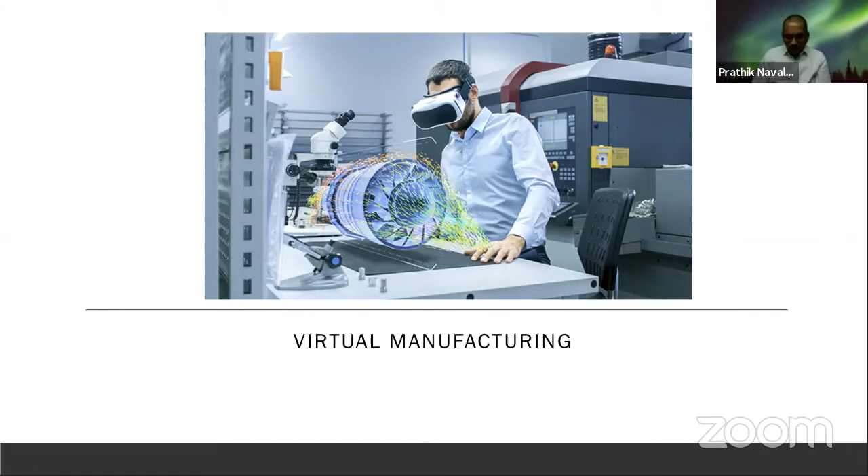So what is virtual manufacturing? What I stated here are basically the definitions which I have understood based on my working in this field. It's performing activities in support of manufacturing virtually. Virtually means you're off-site. You're not physically at the location where the manufacturing happens, and you're doing it on a computer. And we know manufacturing is basically a conversion of raw material into usable form. It could be steel, tubes, hoses, any other things. It is also conversion of usable raw material into finished products as per the customer specification. These are the definitions of manufacturing we learned during our education.

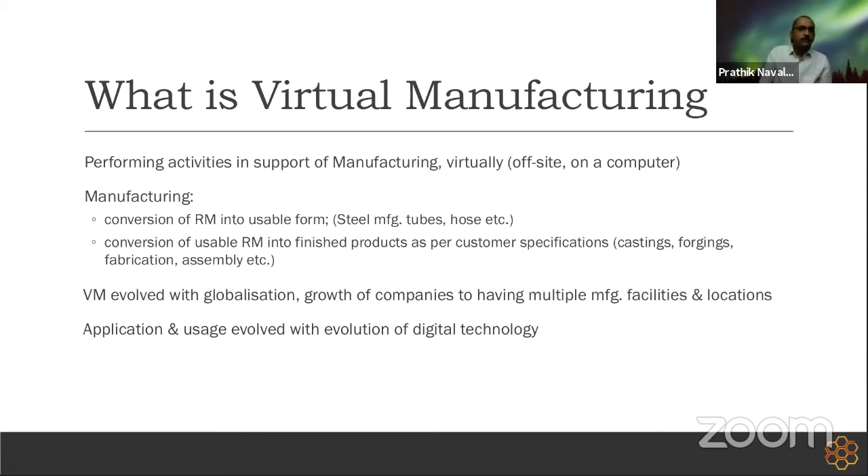Now, virtual manufacturing basically evolved with globalization. As companies grew and started having multiple locations, and as the need for standardization grew, there became a need for a centralized manufacturing team. Along with that need, there was an evolution of the application, which paralleled the digital technology evolution. In the initial days, there was one factory at some local manufacturing location, and they had their own local manufacturing engineering teams doing the process design, the layouts, the line design, implementation, prove-out, production. So basically, it was dedicated.

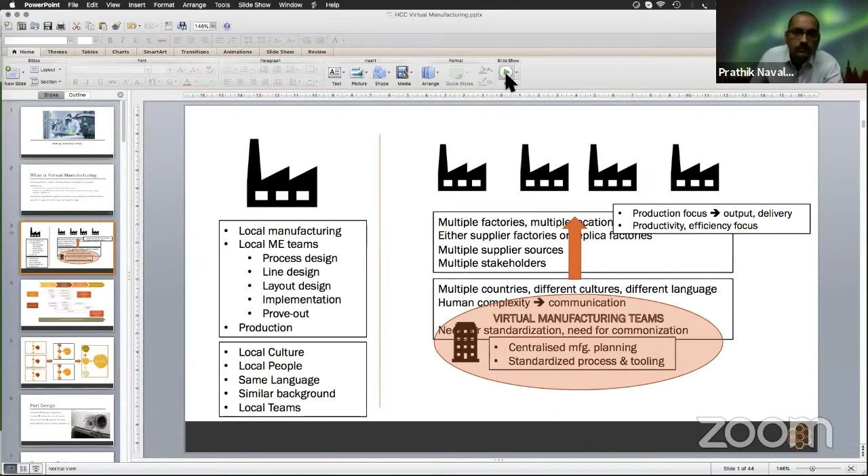Prathik, I think your slide is not changing. Currently, what I see is the virtual manufacturing slide. Oh, is it? Sir, I can see the local manufacturing slide. It's changing, sir. Okay. Maybe it's my side. No problem.

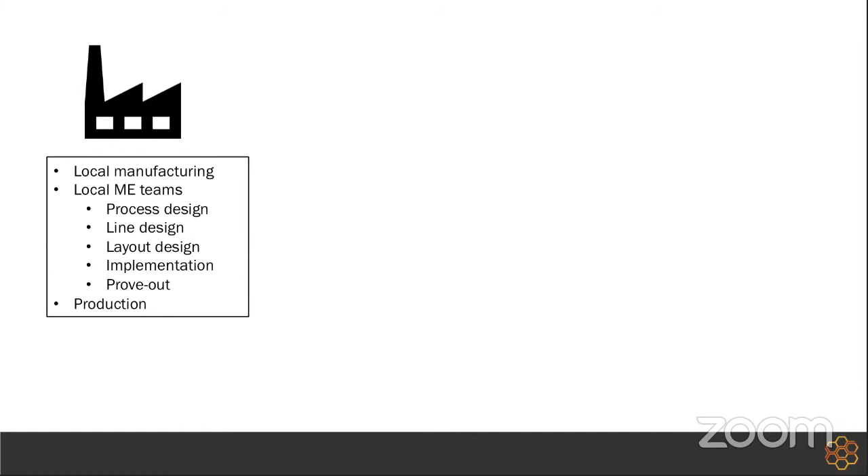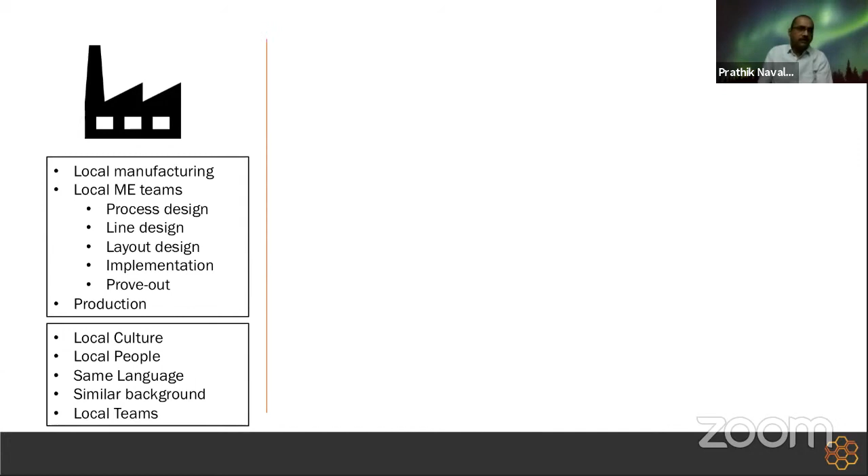Okay. So, like I said earlier, with a dedicated team supporting each factory, the companies were producing. But as the need for the products went higher and globalization expanded, things changed. Earlier, they had a local culture and local people; it was easy to interact, they spoke the same language, and they grew up in a similar background. Hence, the issues that came up were easy to resolve. However, upon globalization, factories started at multiple locations, and either the suppliers were from different places or the same product was made in different locations, with multiple supplier sources and stakeholders across the globe. So then came the complexity of cultural differences, languages, communication.

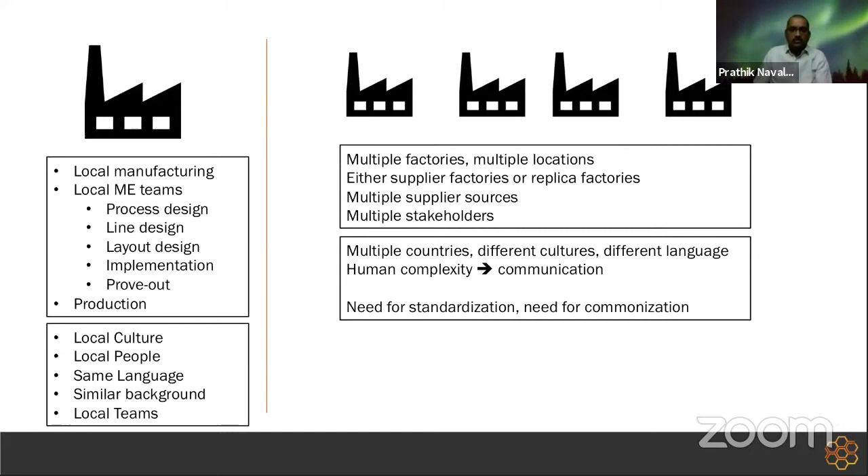Hence, communication became a big challenge. So companies realized the need for standardization. No matter where the product is made, it has to be made the same way, and it has to have the common parts. Only then the cost benefit is leveraged. So with this came the concept of virtual teams: centralized design and manufacturing teams sitting virtually in an offshore technology center, supporting the multiple factories. They were the ones driving the standardization of process and tools, while keeping in mind the local requirements to support the factories.

And the local factories were to focus on the day-to-day work, daily production and output, production, delivery. That way, the businesses were able to leverage the best out of their investments. So this is the background of virtual manufacturing, how it evolved.

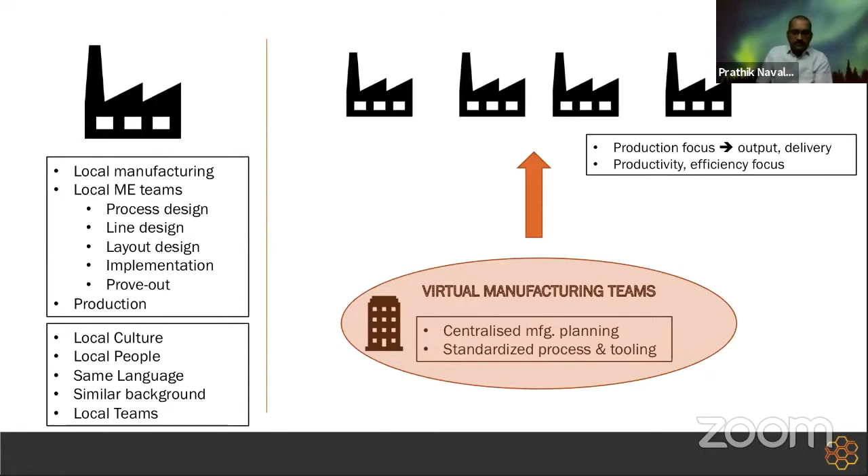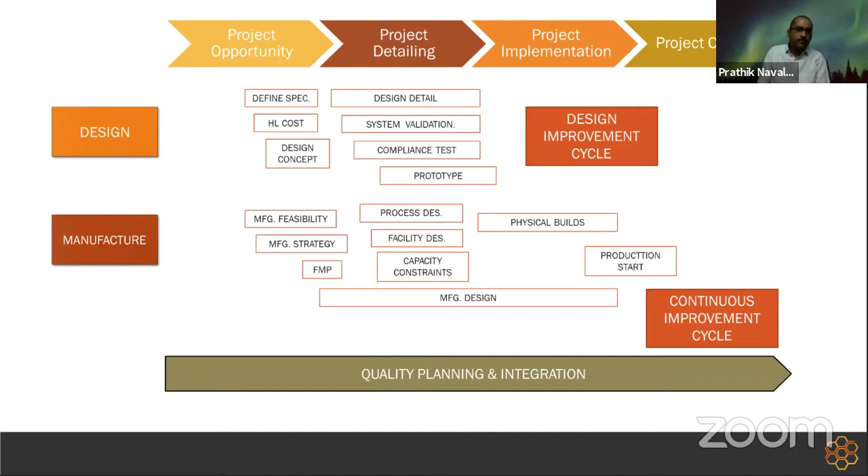Moving on, now we'll focus a little bit on the design cycle. So when we look at global design today, a design consists of parts. Parts go into a component, components go into a system, and systems go into a product. So this is probably the simplest version I could put forward to give the sense of complexity that exists in the real-time world today. So when you look at some of the common machinery that is on the road today with agriculture or construction, there are typically about 30,000 parts that go into the machinery.

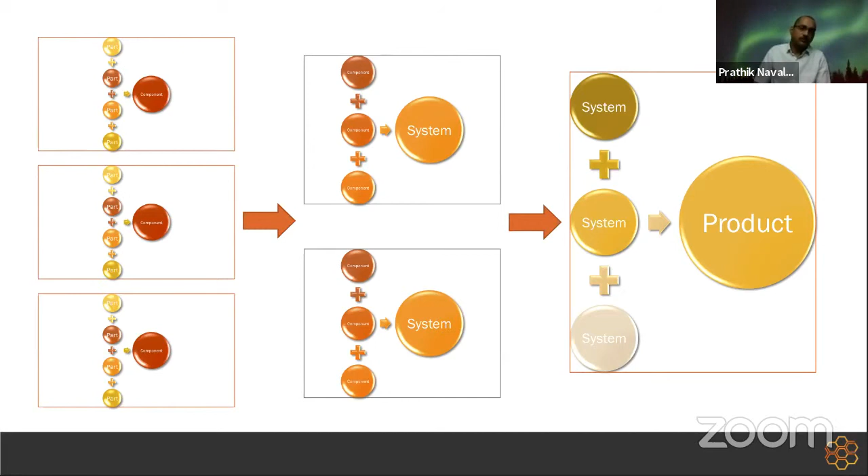So these 30,000 parts again get accumulated as components, systems, and products. So what companies do is they have their virtual engineering teams, individual design engineers designing the parts at a part level. And then there would be an integrator who would integrate it into components and systems and products. So these are today possible only with use of digital tools, like you will see in the upcoming slides.

So now when we talk about a part design, I want to also mention what is significant about part design. Okay? Although we're talking about virtual manufacturing today, it is important for us to understand the virtual engineering portion of it, which is primarily focusing on product design.

Because today, design and manufacturing are not two sides of a coin. They work very closely hand in hand, as you saw in the earlier product development chart. So it is very important for us to understand the constraints and the philosophy of design as the product gets progressed in its life cycle.

So when a part is designed, the photograph that I have here is basically to give you an example. What you see here is a very simple fuel cap. This is a fuel tank cap that we all see in our cars today. So what goes into design of this cap? There are compliance, ARAI or respective bodies, SAE, have standard guidelines and compliance safety norms to ensure that the product does not cause any legal or safety issues. So the design engineer has to work in compliance with those standards and some of the basic specifications which are there. And the specifications are derived based on the standards and the application.

And then there is a geometry. Now you can see here, for example, the physical constraint for the design engineer is that it has to go and fit into the fuel tank and it has to be accessible for the end user. So there comes into the mating parts, the assembly, and the serviceability, which he has to keep in mind. Then the physical boundaries. You are forced to work within a physical set of constraints, boundaries which cannot change, and which will define the clearances and the tolerances within which the part must be designed.

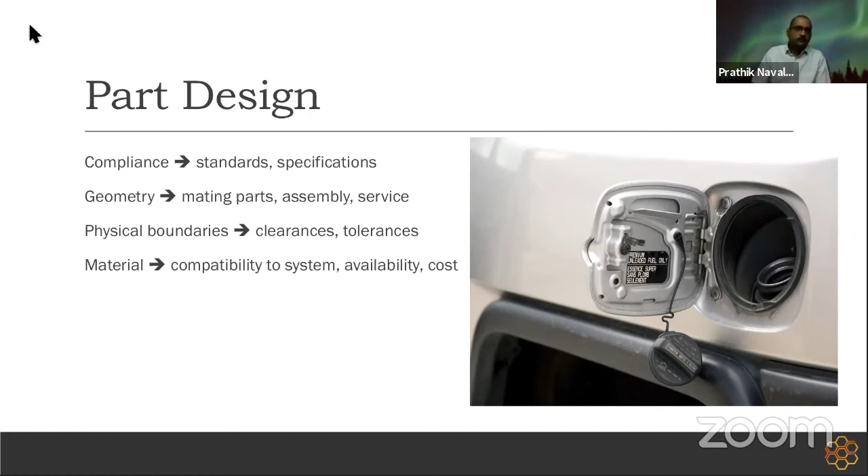And finally, also the material. In olden days, the design used to be based on the material locally available within the area where it is designed. But today, when we talk about global designs, we have to keep in mind the common material which is available at most locations. So material availability is very important, and the cost. You will also see later today how, within the virtual engineering and virtual manufacturing domain, the costing is also taken into account. So this is specific to a part design.

Moving on to a component level design. What you see here is again an example of the railway. When you go out near a railway track and see the wagons that go, this is what is underneath the wagons. So this guides the wagon. This is just for information. So this is called a bogie. The bogie is a system, and some of these elements within the bogie are components which consist of multiple parts. So when the design is done at a component level, it integrates multiple parts. So it becomes very critical for a designer today to visualize how overall the parts come together to form the component.

So this is an example where the digital tools which we spoke of yesterday, and the virtual visualization, come into play for effectively designing the components. And when a designer who's sitting virtually and designing a part is able to understand how it fits into the next level of the component, he is able to understand the constraints better and able to churn out the design first time right.

And then there is virtual validation. Virtual validation is a key part of virtual engineering, where many companies no more go into lab tests. What they do is they use the advantage of the digital technologies to do the virtual simulation. For example, if it is structural validation, we have finite element methods, and today software is capable to handle advanced complex designs and still give you a reasonably predictable result.

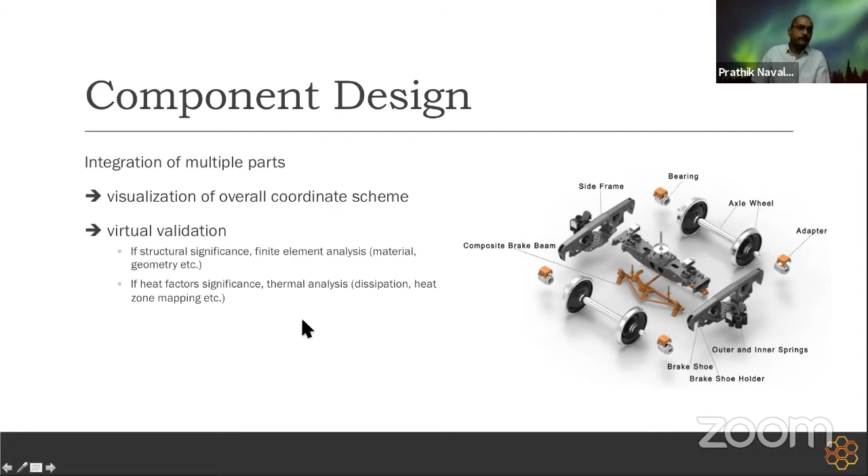So now here is a live example of how this virtual engineering, specifically finite element analysis, is used in the industry. Again, going back to the bogie example, what you see here is a typical wagon that is used for carrying iron ore. This is a common sight for anybody who stays near the railroad lines. And what you see below is the bogie, where, through use of virtual tools, you're able to explore the various components and understand visually. You don't need to be physically present near a bogie to understand how it falls through.

And this is an example now where the finite element method was actually used not to check the structural integrity, but to derive the loading and boundary conditions for redesigning this component using composite materials. So this was for an advanced research project. And so there we simulated the existing brake beam. This is the beam that applies the brake on the wheels for the train.

And the loading conditions were put in. And this pattern was used as a benchmark or as a maximum load criteria for design of the composite bogie. Okay. So what is of importance for today's engineers is to understand that in finite element methods, the person must have a good functional understanding of the system before he or she gets into it, understand the material properties, the boundary conditions, the loading, and also the interpretation of the results.

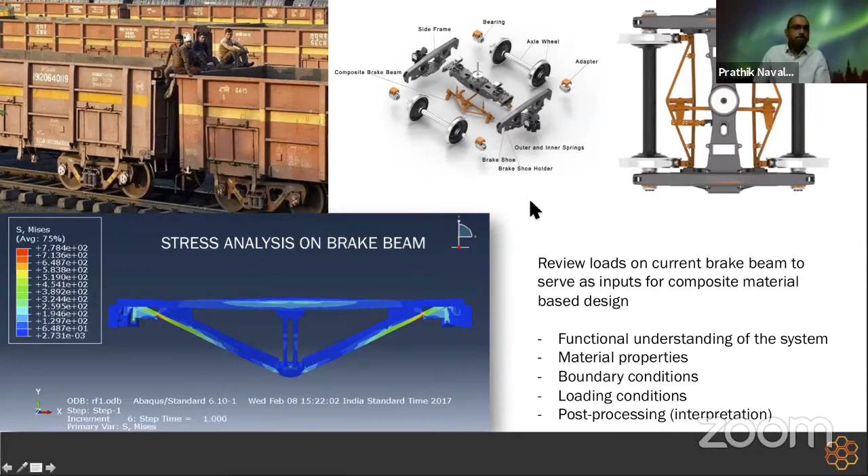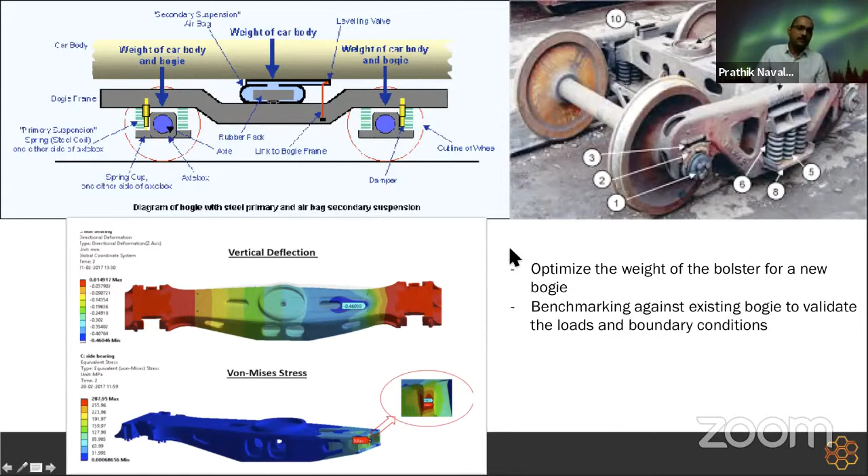So we spoke about part design, we spoke about component design. So next stage in this is a system design. So when the components are integrated within a system, it's important to make sure there is a functionality check that is done. Okay, so there are several tools today in the market for performing this. For example, if we take the suspension system of a two-wheeler or a four-wheeler, it is going to be complex for us to go and do manual calculations and also visualize how the system would function on the road, right?

So earlier, how they used to do it is they used to have cameras embedded to understand the vertical and lateral movements and have strain gauges attached to them to understand the loading criteria. So now with advances on the digital front, there are software available to perform what we call multi-body dynamics, to understand the dynamics of the interaction of different parts, what we call bodies, which interact with each other and which are constrained by each other.

When a suspension system is attached to the chassis and to the axle, it is constrained at those 2 points. So when it functions, it is not allowed to freely function, but it works under constraints. So that's a simple explanation of that. But MBD assessments are very common today in the automotive field.

Then the other thing that is done is clearance analysis. Again, when multiple parts, to the level of 30,000 parts, are going into a system, and if there are 25 different engineers working on it, it's very common for people to miss out on some of the features of the part. So before the design is progressed further, there is a clearance analysis which is done to make sure that part interferences don't exist and there are not any unpredicted gaps. I'll show you some examples of that in the next few slides.

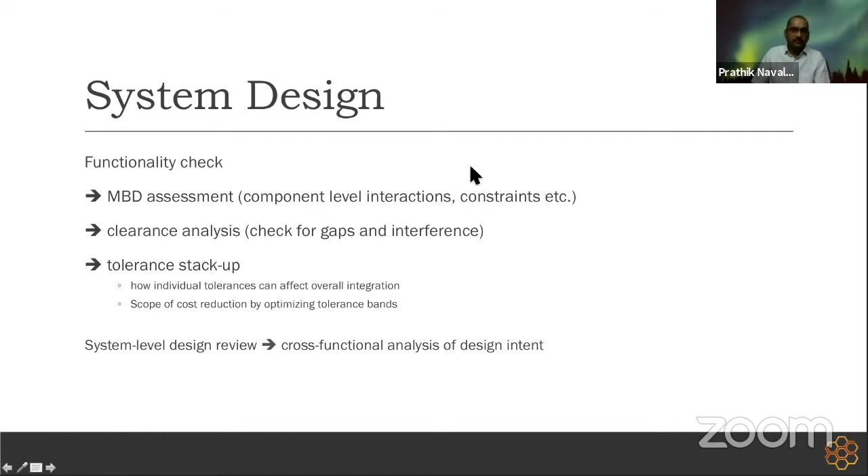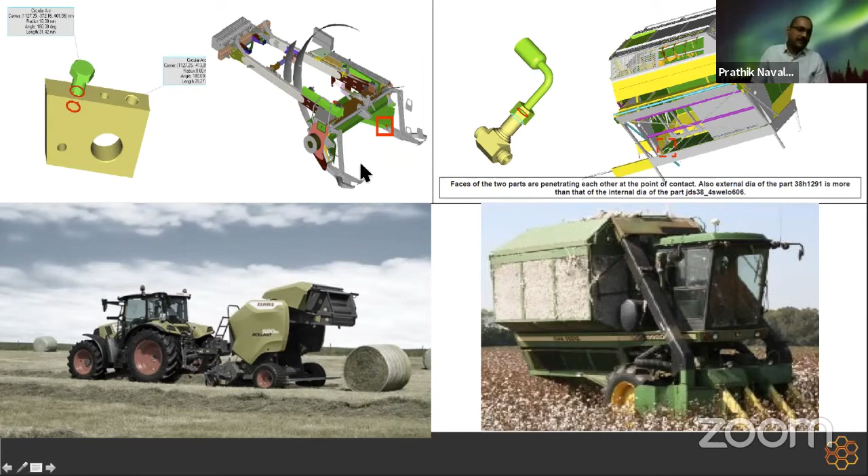Next, we talk about tolerance stack-up analysis. So while this has been a quality function, nowadays it is falling on the plates of a manufacturing engineer and in some cases a design engineer, where at the time of design itself, they go back and validate how, at a system level and at a component level, the tolerances stack up and what room they have to increase the tolerance bandwidth so that they're able to reduce the overall cost.

So next, we'll see a video of how the digital tools today enable a manufacturing engineer to perform this analysis as he validates the design.

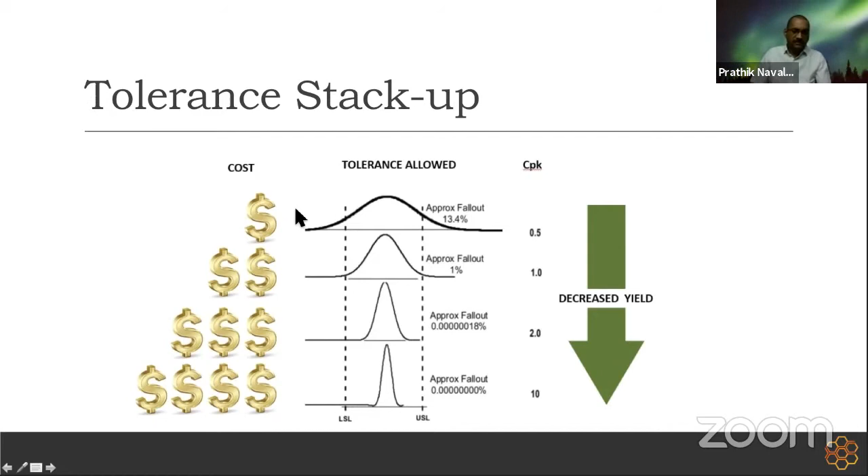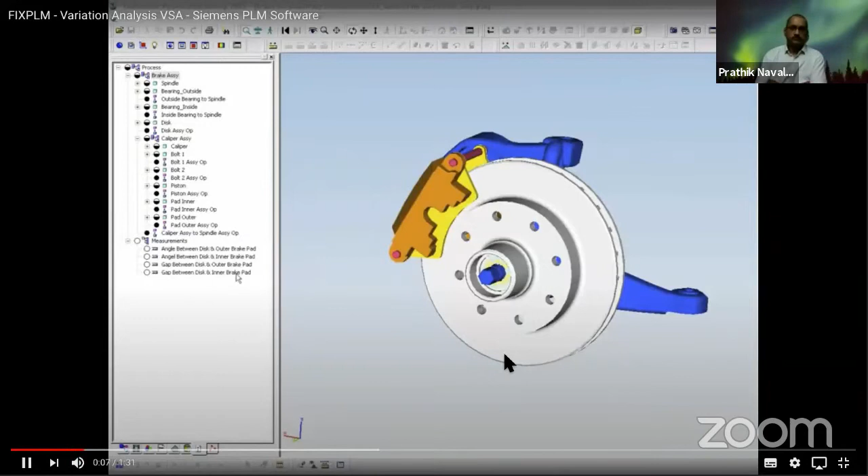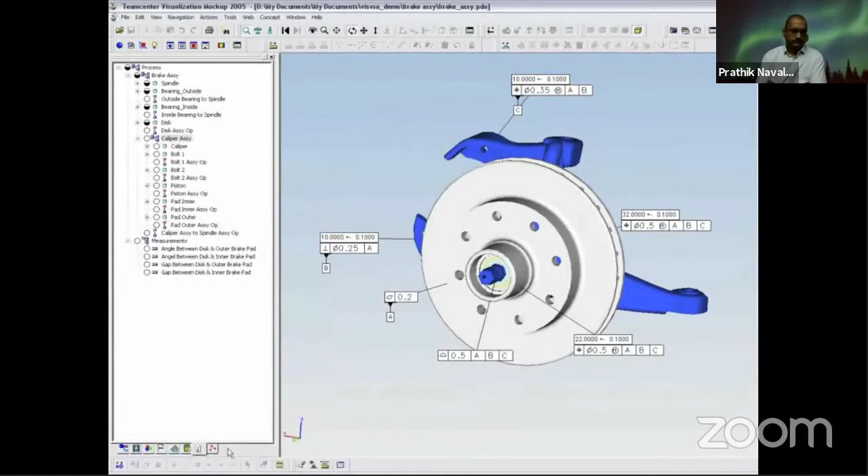Variation in assembly build problems. In this example, we'll look at the variation introduced through the process of building an automobile brake assembly, where controlling the angular variation between the brake pads and the brake disc is critical to the proper function of the braking mechanism. The entire process model is represented in a tree structure on the left side of the window. The process tree contains all the elements that comprise the analysis: parts, assembly operations, and measurements. The features contained within each part that are used as datums in assembly operations or for measurement are toleranced using GD&T, or geometric dimensioning and tolerancing.

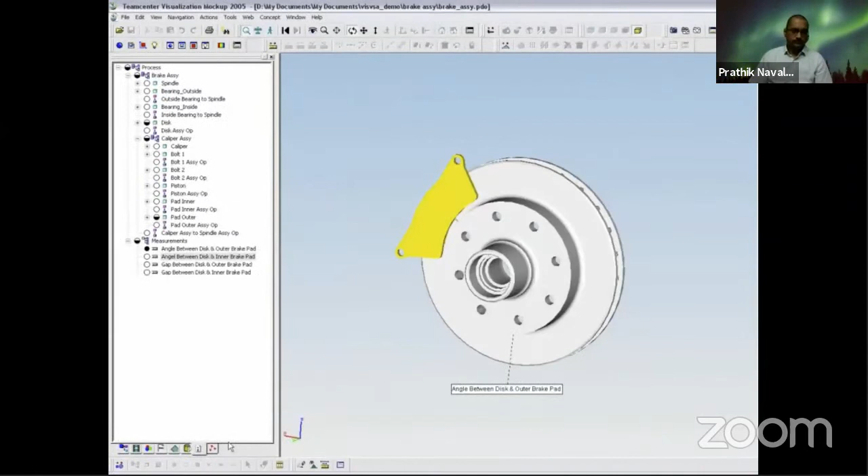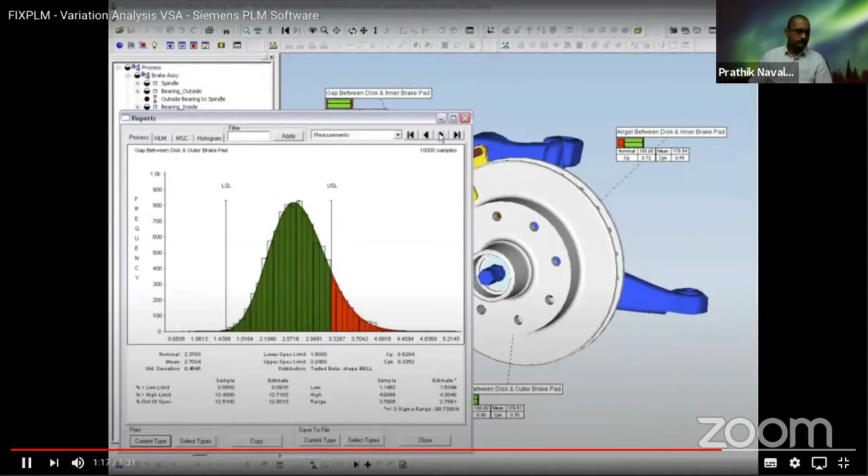Once the features and tolerances for all parts have been defined, assembly operations identify how these parts will assemble or interact with one another. The next step is to define the measurements for the critical dimensions to be controlled. In this case, the angle measurement between brake pad and brake disc. Once the process model is defined, simulations that replicate the virtual build of the brake assembly are run. From the reports generated, the variation magnitudes and contributors may be viewed for each measurement. Model parameters, such as tolerance values, may be changed and the simulations rerun to ascertain the impact of the change across the entire assembly.

So what we saw there was the tolerance stack-up analysis for this wheel disc assembly as it was narrated. And this is something that today is a very common sight. You go back and see design engineers and manufacturing engineers who use such tools. There are many tools available in the market where they are able to concurrently modify the designs and determine the adequate tolerances for the parts, thus being able to deliver a product first time right, at the same time at the right target costs. Okay.

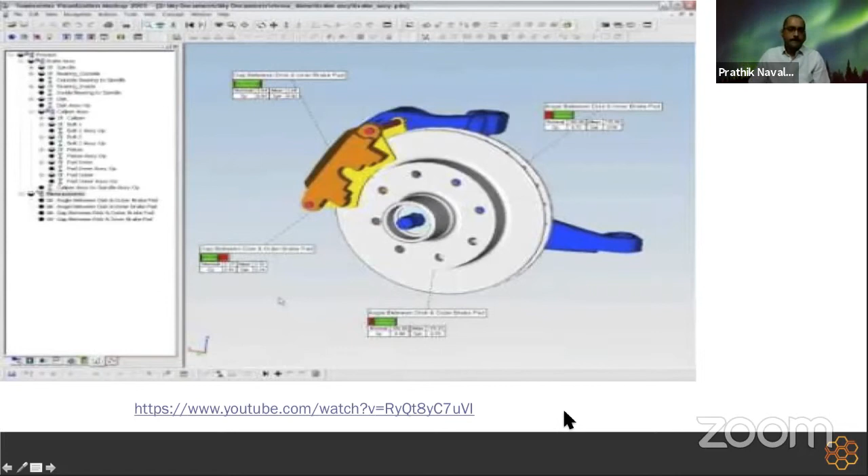So just a second. Okay, so next we come to, so we saw part design, we saw component design, we saw system level design. Okay. So now when all of this integrates into a product, that is the end saleable commodity for which all the groups have been working towards. So it's important for the designers now to look at systems integration, how the systems integrate. So this is a very, very important and critical function that you will see in the video to come.

And as they look at the integration of systems, they are able to dynamically modify the designs through digital technologies available today. Another key feature which you will see is the marketing alignment. Much earlier in the concept stage itself, companies today use virtual reality capabilities to showcase the upcoming product to their dealers and their customers, to receive live feedback so that their valuable feedback gets integrated much earlier in the product design lifecycle. Again, another video that I'll show you towards the end showcases this capability.

And then the compliance check. Okay, today when a tractor is designed, when a car is designed, they have to comply to certain specifications, such as the turning radius, the overall boundary of dimensions, the emissions, etc. So these are possible, again, like I mentioned before, through use of virtual tools.

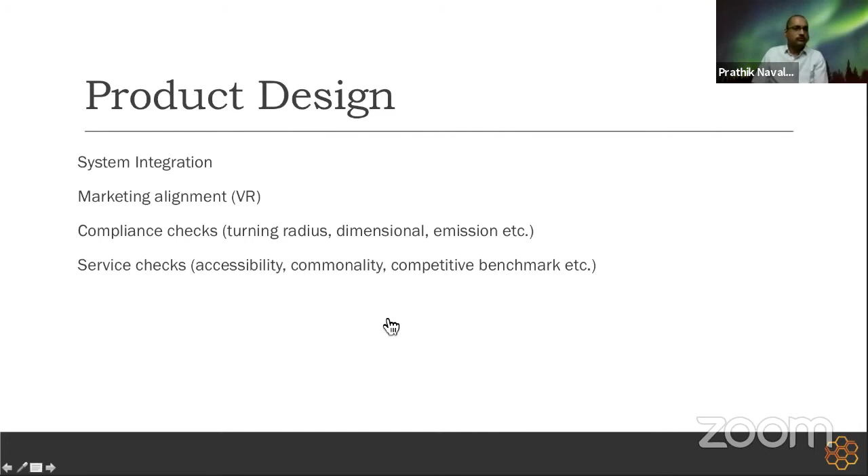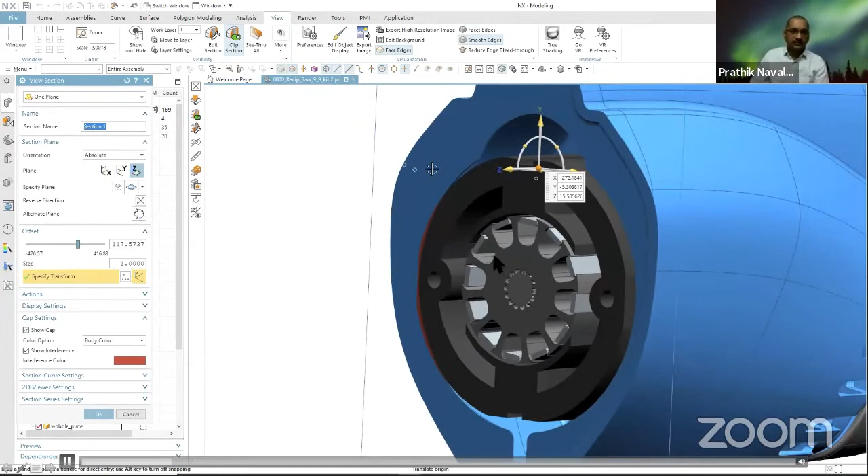What you see is an air gun. This is actually a drill, hand drill, and or a hand screwdriver, where you can see dynamically how the designer is able to verify the individual systems and components that have been integrated. And at areas where additional clearances are required, he's able to modify them. So here you can see at the body, he's able to go and adjust the rib.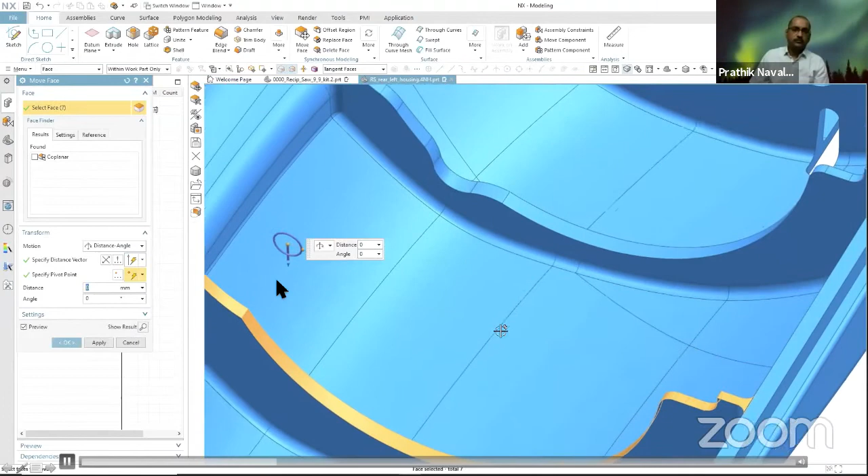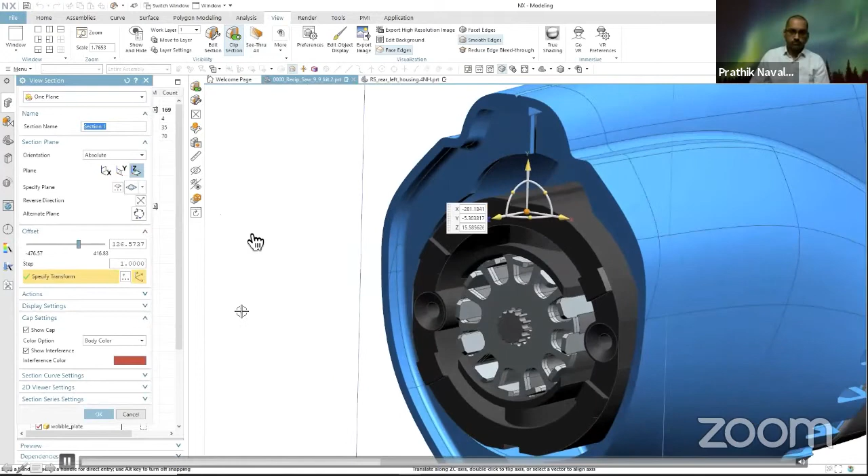Right now, at the time this part was designed, the designer might not have been aware of potential interferences. However, at the time of integration, you see such interferences come into notice, and then the integrator is effectively able to go back and make minor adjustments to the design. So it doesn't have to go back into the entire cycle of redesign again. So he is able to effectively visualize. He doesn't have to physically see the product.

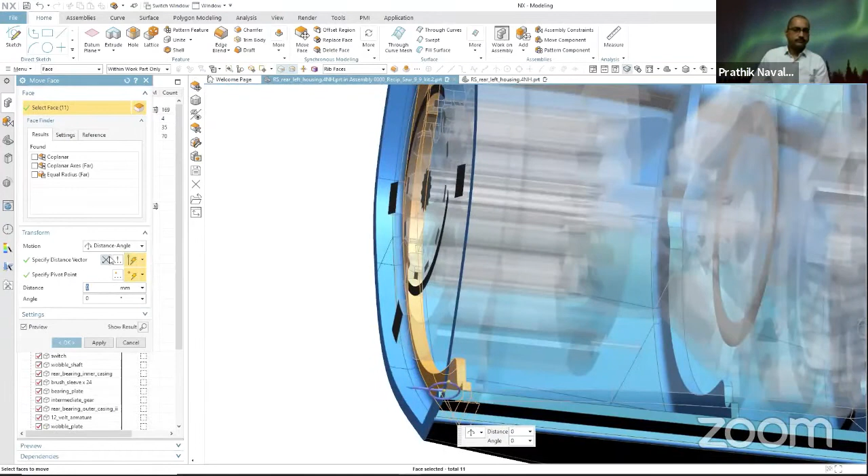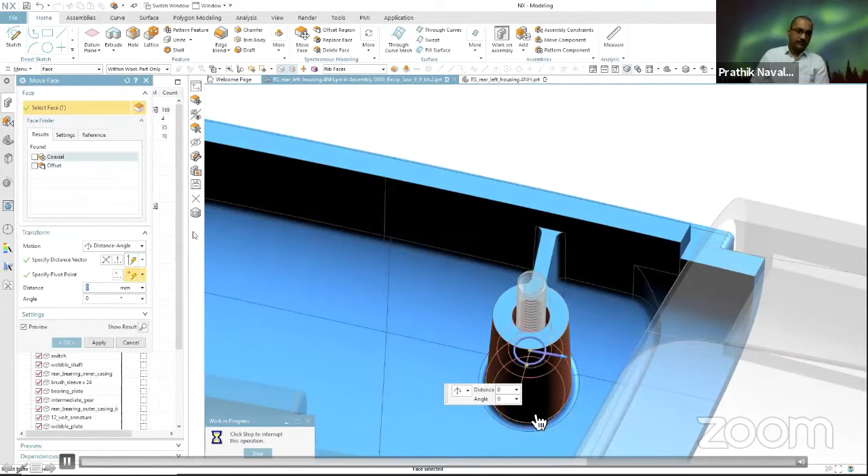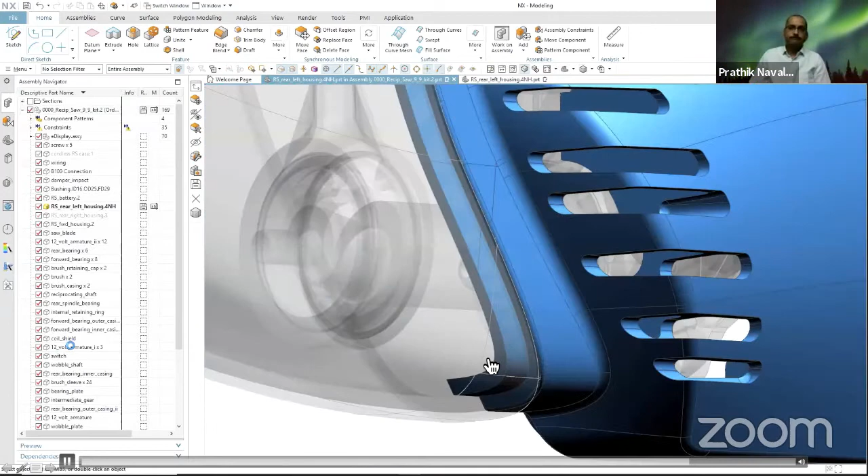So now this particular change will be very interesting. After all the parts are assembled, it is realized that the height of this particular feature is not right. So he's able to go back and now modify the height of that feature and quickly correct the design. You can see how there is a misalignment. And so he's able to align, if you see there is a radius earlier where this feature was. So he's able to move the radius and quickly be able to correct the design. So this is another example of virtual manufacturing.

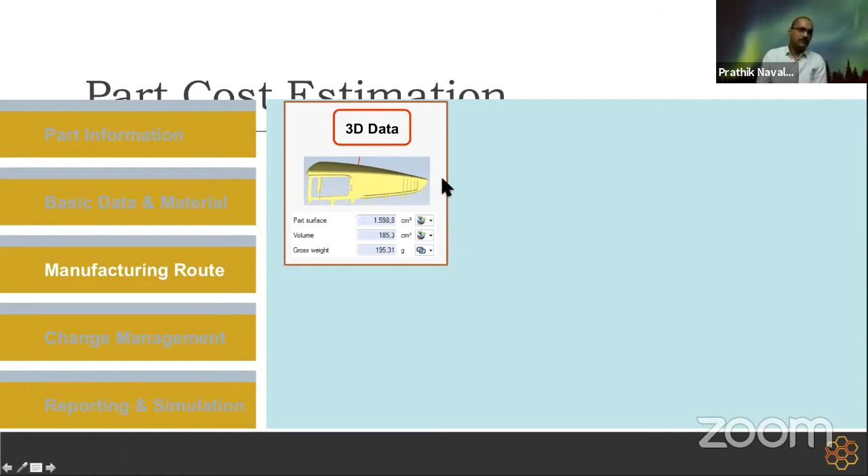So now what we'll see is a part cost estimation, how this is used in today's world. So the virtual tools, there are virtual costing tools that are available in the market today, which are used for effectively managing the cost of the total product. So the 3D data is taken, and then the materials are assigned. Then the cycle time of manufacturing is estimated, again virtually through the information available in the system.

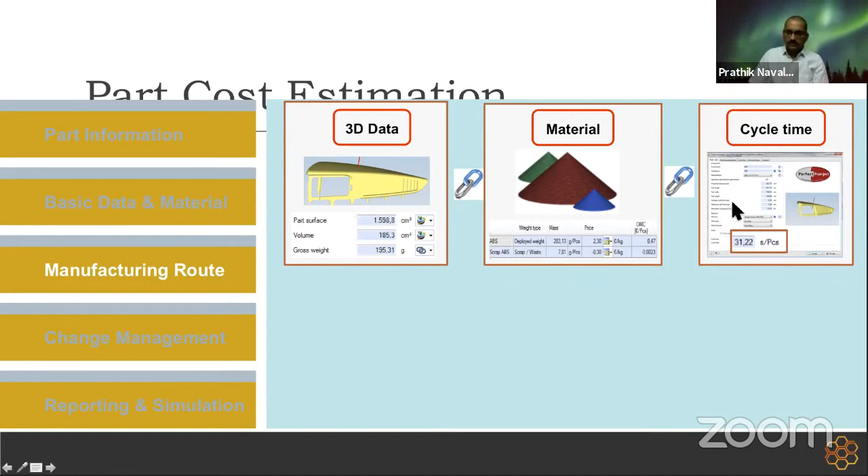And then the cost per hour based on the location where it's manufactured, that is fed into the system. And then the overall manufacturing cost is able to be derived. Okay, so all the data right from the product design and the material to the factory cycle time, the overall work content of the product is now available for the engineer to go back and estimate the overall manufacturing cost.

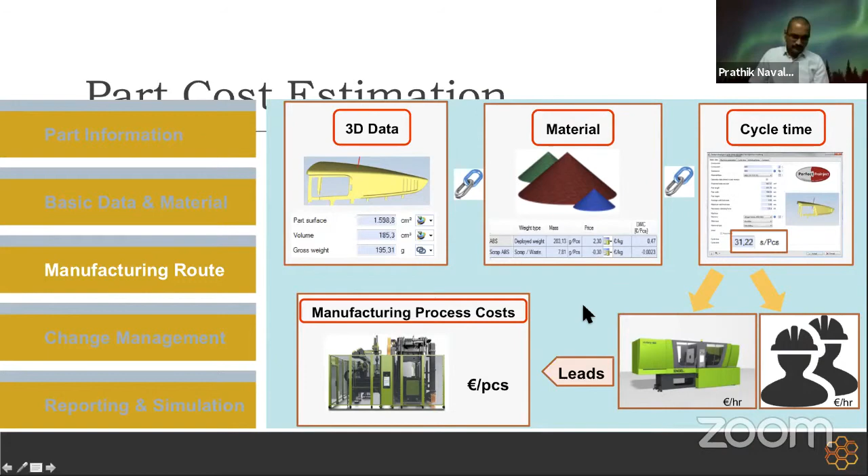While companies focus to deliver what is important for the market, they also today have to keep an eye on the overall complexity, as it would impact the overall manufacturing cost and the feasibility of manufacturing. So this is a place where the digital tools come in very handy, like you will see in the further slides to come, where an engineer is able to sit off-site from the factory and determine whether the design is feasible to make or not, and what are the changes that are needed to make it manufacturable.

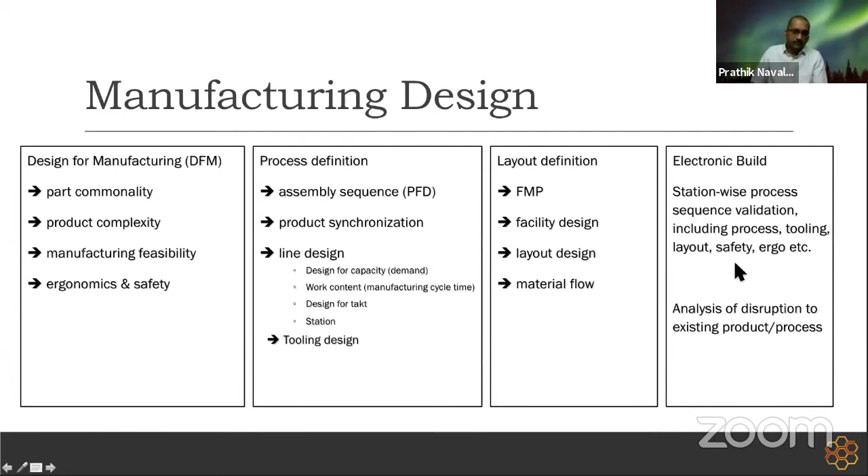So one of the key factors is design for manufacturing. You will see some pictures in the next slide of some of the effective designs and some of the poor designs also. But it's important for us to understand the need for design for manufacturing. So what happens if a design is made and then the part is manufactured and then you find an issue, you have to go back and redesign it. So there is a cost impact on account of that change, because you make a part, you make a mold or a tool, you build the mold, you make the part, then you decide the mold has to go to change. So the cost of doing that is going to be higher as the product cycle progresses.

So it's very important for engineers today to identify problems much earlier in the stage. So that's where the need for DFM comes in. So here specifically, we'll talk about design for manufacturing and assembly. Okay, there are various DFMs. There's design for casting, there is design for machining, there is design for paint, there is design for serviceability, etc.

But what we focus on today is specifically design for manufacturing assembly. So what we mean by that is the design gets validated at a part, at a component, and at a system level for manufacturability, for assembly. So what they check is whether the assembly is feasible, whether the operator has access to the area where a part has to be assembled, where the tool has to be reached.

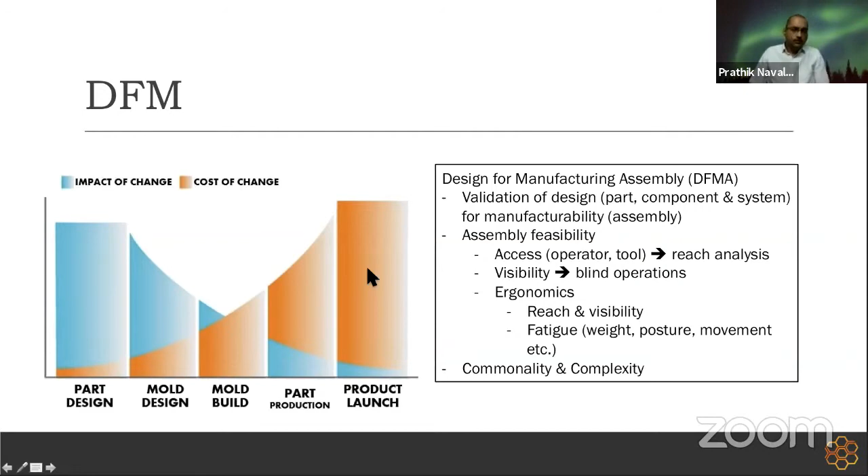So typically what the engineer does today is they provide for an inclined surface for performing such operations, which they are able to validate much earlier in the process design stage itself.

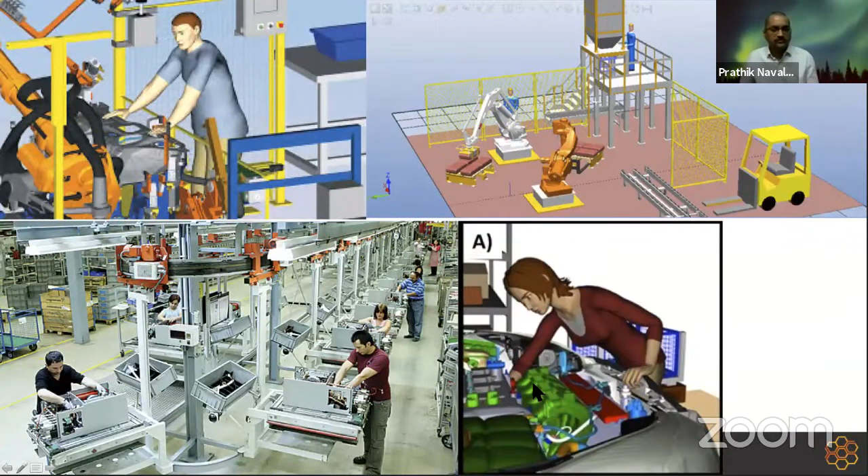Another one that you see on the bottom right of the screen is where this operator is bending down to do an operation. Again, you can see where she has to stretch to do that operation. So if the stretch is inevitable, unavoidable, then they will work on having fewer hours for this particular operator, and they will change the operator frequently so that the fatigue doesn't come in. At least today, virtual tools enable the manufacturing engineer to identify such areas and plan for them accordingly.

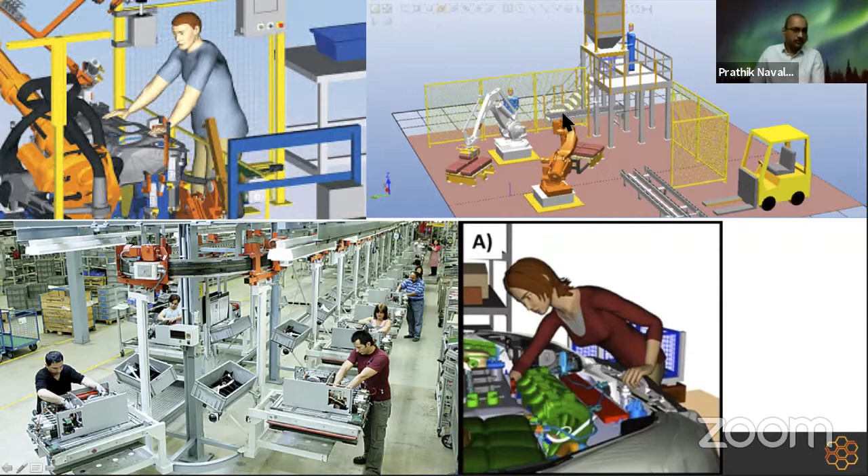What you see on the top right here is a virtual cell where there are 2 robots performing a pick and place operation. And this is the level of visualization that is possible today, where you're able to plan for space for a forklift to bring in the part, and also study the movement and the accessibility for these robots to perform the operation, and also virtually program these robots to avoid collision.

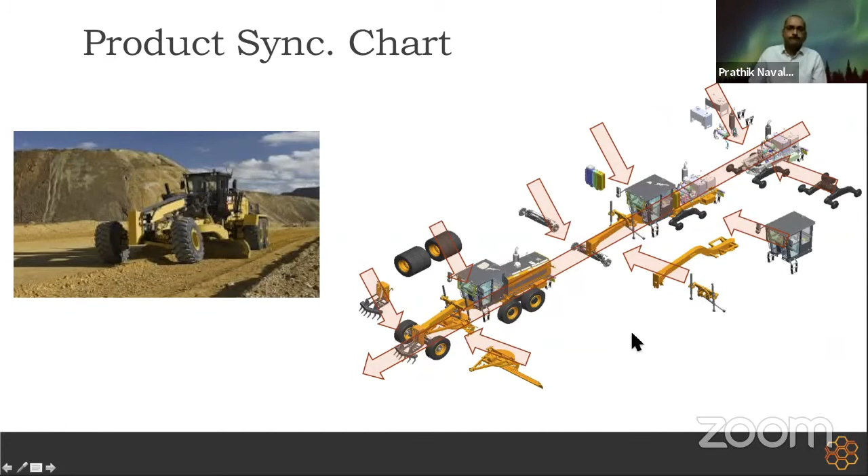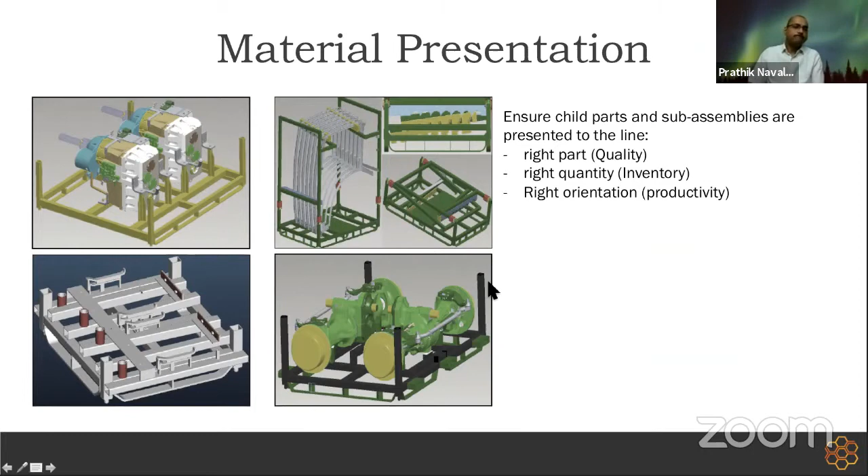Another example where virtual engineering is used for supporting manufacturing activities. This is actually a non-conventional area where the paint system, when parts are fed into the paint system, the parts are loaded on the load bars. So conventionally, the orientation of the parts is designed only after the part is made.

However, through virtual tools today, we are able to do that effectively and define the labor costs involved in loading the parts for paint, and also ensure that the parts are oriented the right way so that there is optimal use of paint. At the same time, the paint quality is also controlled.

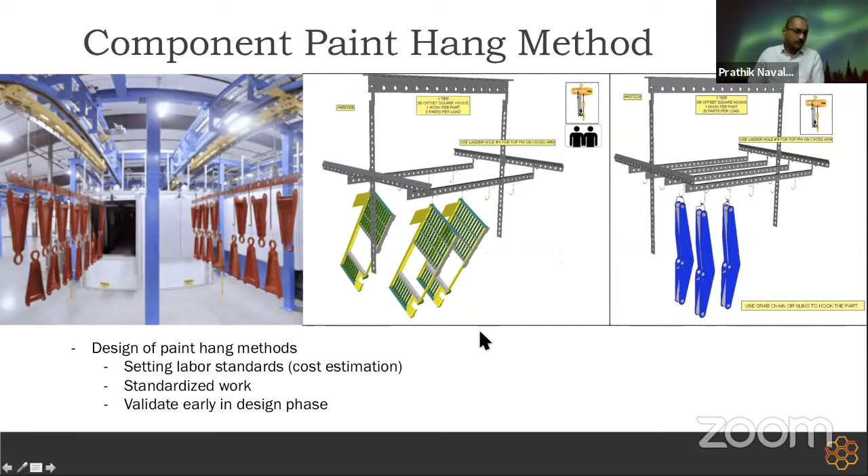Another aspect is the product shipping, where companies today make the product in one country and export it to another country. And there are local rules in the destination country where local assembly is mandated. So this was a project that was executed in such a scenario. This is a representative product, not the exact product.

So this product is being shipped in a 40-foot container, and digital tools were used for the manufacturing engineer to design this solution virtually. Okay, so the manufacturing engineer basically defined the disassembly of the product and the assembly into a module and the packaging within a container.

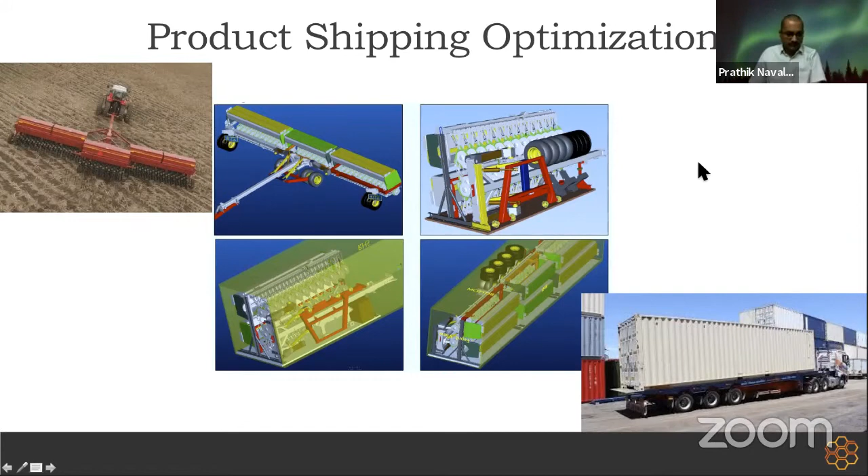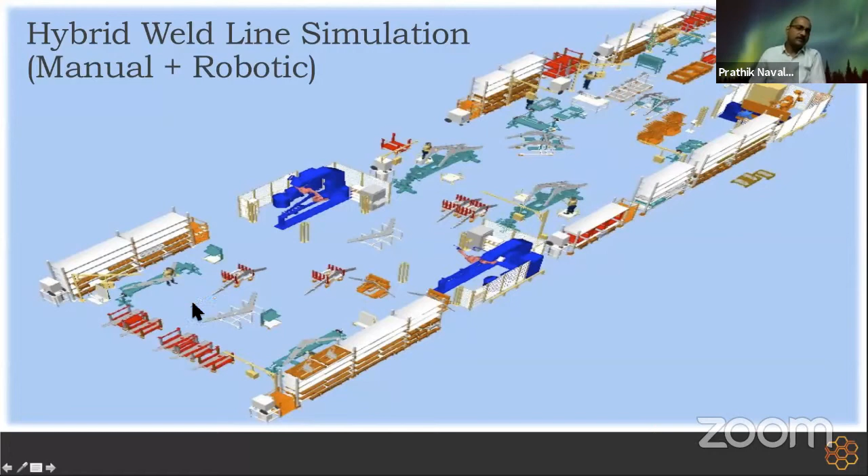So here's another example of operation simulation being done in the virtual environment for a boom welding line. Okay, what you see here is a boom, a loader boom. So the loader boom is a combination of manual and robotic process. So using digital tools and using the virtual environment, we were able to simulate the entire operations, right from input to the output, to match the demand for this particular weldment, which is used for the boom assembly.

So here the key was to generate the operation sequence and to simulate the entire operation, which involved manual welding and at the same time robot welding. So you can see robots in the line. So here the robots' offline programs were developed, and also the manual welding was simulated. At the design stage itself, the reach of the operator for the respective weldments was validated, and the entire operation was simulated to meet the demand output of the line.

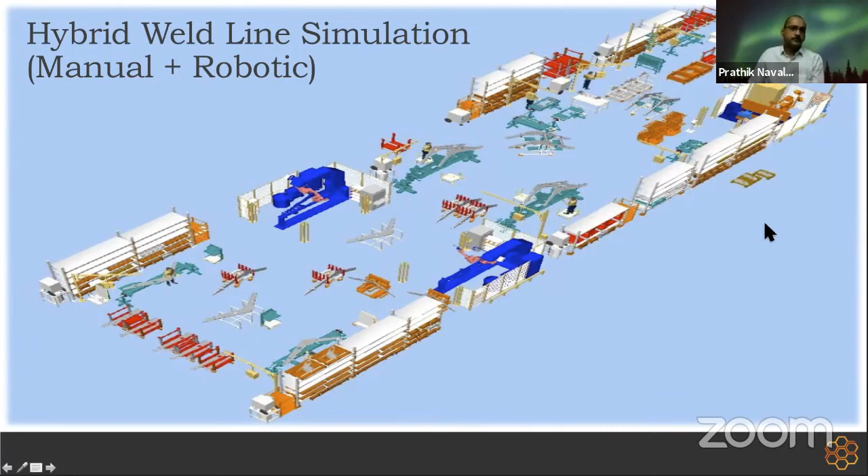So this is actually just a pictorial representation of how the overall virtual manufacturing scheme of things comes into place. It's very hard to read here, but this is the best I could do with the screen, right from defining the product process flow diagram into developing the line design and doing the operator ergonomics, doing the tooling designs, doing the product shipping configurations, and also doing offline robot programming for welding, and also offline inspection programs for the coordinate measuring machines.

So this is what a manufacturing engineer today goes through in his routine job when he works on the new product development life cycle in the industry.

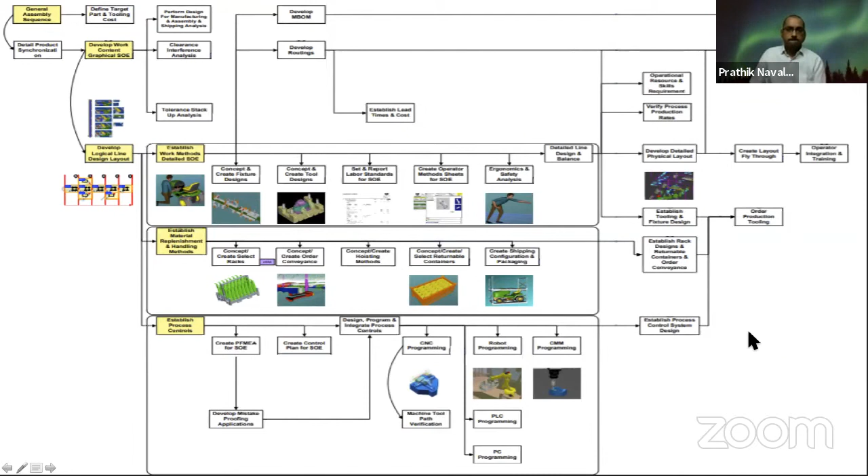Okay, so now we'll end the session with a video, which is a commonly available video on the internet, but it demonstrates the real-time situation where virtual reality is used today for various applications in the product development lifecycle.

Again, this is a video that is available on the public domain, so anybody can go.

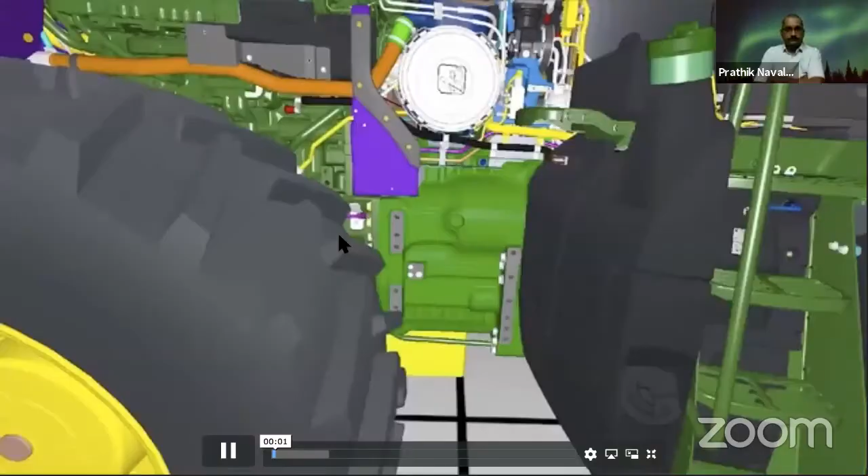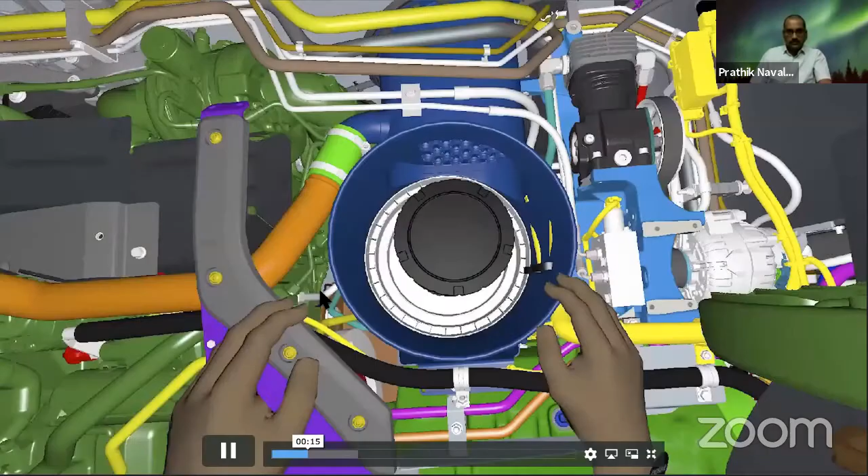Being able to physically get your hands on a tractor without physically getting your hands on a tractor is very important, in my opinion. This technology allows us to visualize tractors earlier in our design process, so we can shorten the time from concept to production. Tractor platform customer support engineers are using different visualization tools to view three-dimensional models prior to any physical builds. We used IC.IDO software paired with an HTC Vive headset.

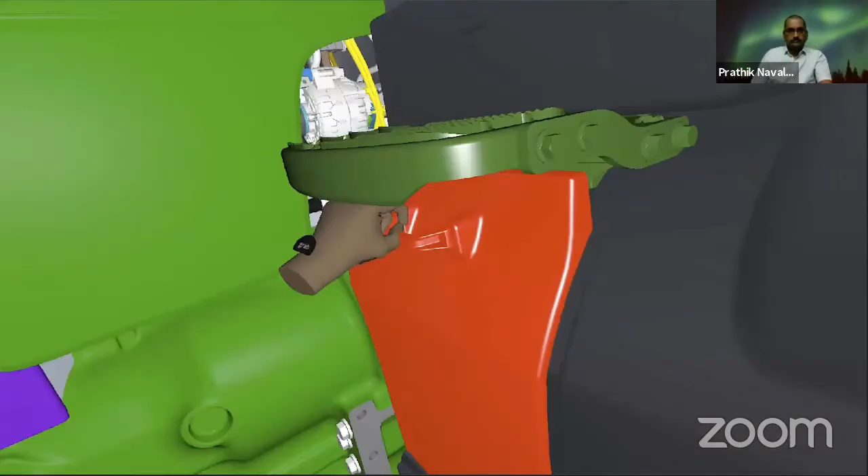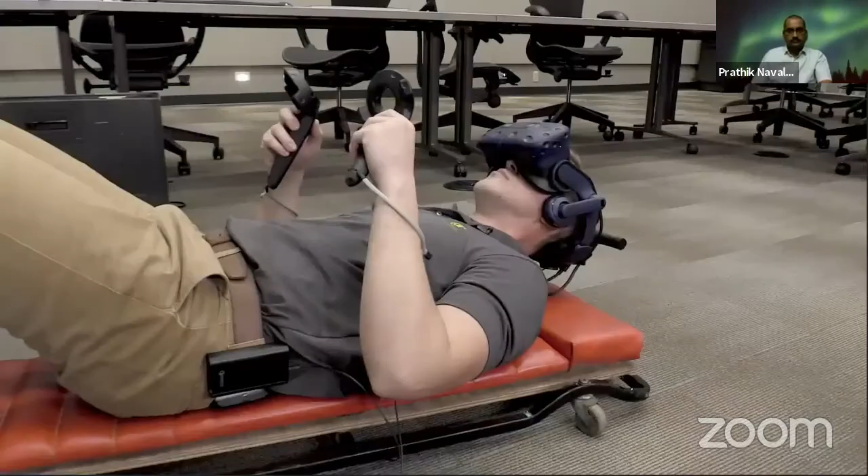And this combination of hardware and software allows us to open a complete tractor, 15,000 plus components. It's just like being there on a tractor. Participants can take apart a tractor, disassemble, cross-section tractors in real time. Probably one of the neatest things that I've ever done was, for the first time, I actually put on a headset and rolled around on the floor pretending that I was working on the tractor, where just 2 years ago, I was actually doing that on a shop floor, but this time I wasn't actually getting dirty.

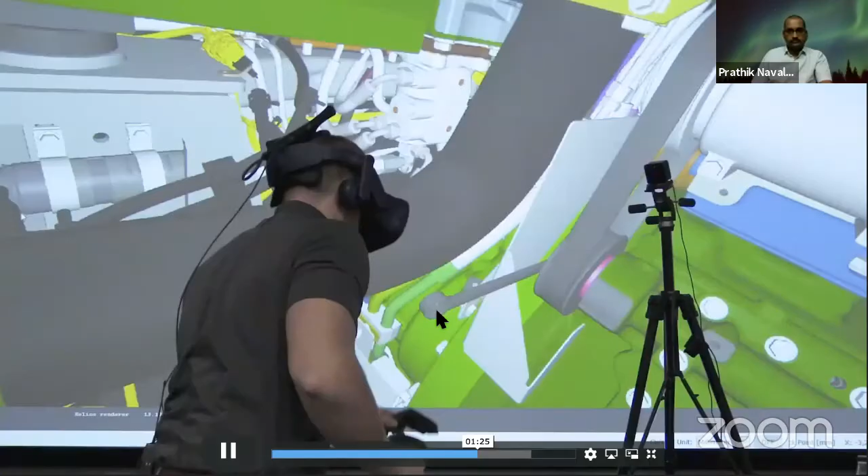So we like to use Creo View and visualization to see how we have access to different components on the vehicle. We use virtual tools when we can't come to a solution using traditional 2D models. Usually we find issues with tooling or design or facility layout. We show them 3D models as well as the virtual environment to get a better understanding of how we can better influence our tractor design.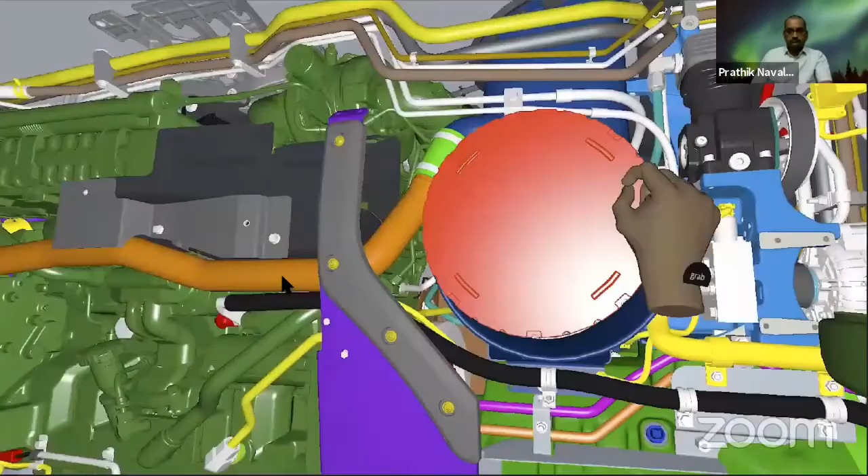It saves a lot of time and money being able to virtually evaluate it before you build hard parts. This technology makes my job easier because the engineers are working with their own geometry in a natural way. But we use many tools to design tractors, and this is just another one.

Okay, so those are some of my colleagues during my earlier job, but this is what today a manufacturing engineer sitting in a technology center virtual environment works on in reality. So that brings an end to my presentation today.

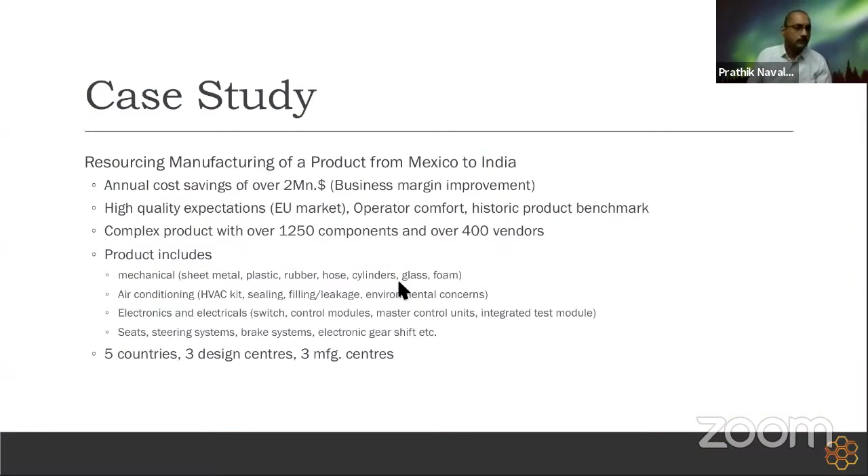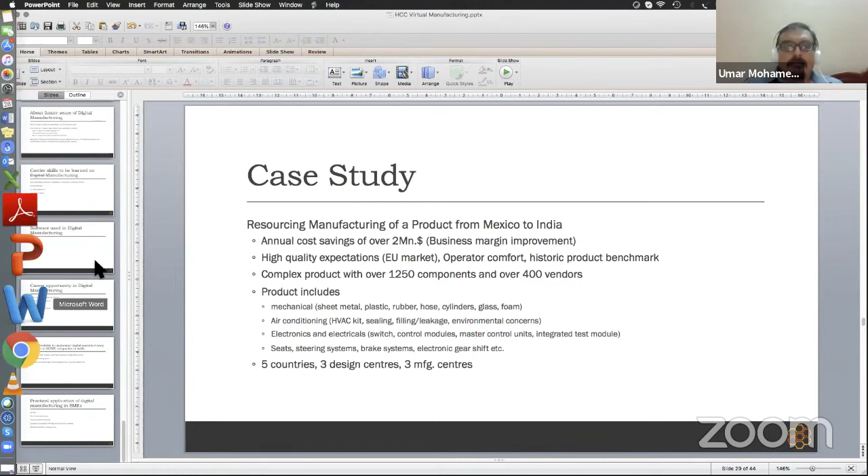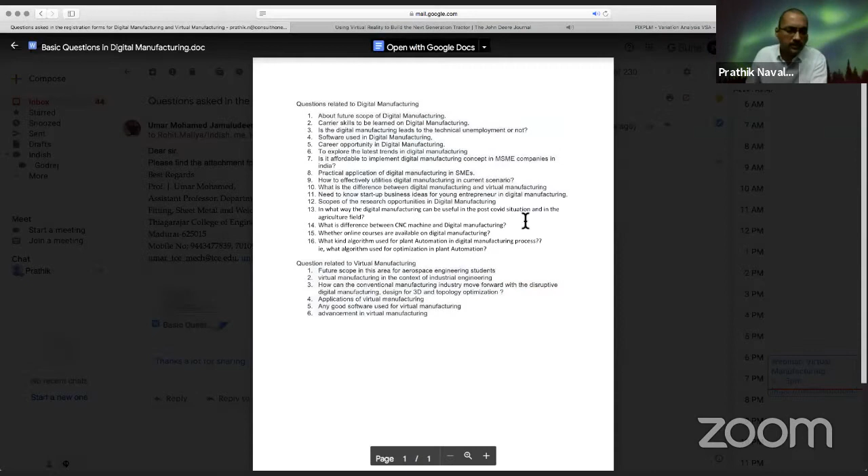And Mr. Umar, if you want, we can go into the question answer sessions. Okay, sir, you can go to question and answer. Sir, you can go to question session, sir. Yeah. Some questions I have mailed. Okay, so I will go into the question session, just a second. Just give me a second. Let me open the question list that you sent me. Okay, so I will open the questions document. Can you see my screen? No, sir. Yes, sir, we can see. Oh, yeah, now, yeah.

So there are many questions. So I'll probably do about 10 questions in the paucity of time. So one was, what is the difference between virtual manufacturing and digital manufacturing? Okay. So I think we have now covered that topic. Yesterday we did digital manufacturing, the use of digital tools to aid the manufacturing function. Now, digital manufacturing is actually a subset of virtual manufacturing.

Virtual manufacturing does not necessarily mean you use digital tools. You sit at an offsite center, use a computer and support manufacturing activities. And digital manufacturing enables the performance of the virtual manufacturing function. So that's the relationship between the two.

The other question that we had was, what is the future scope in this area for aerospace engineering students? So obviously aerospace is much advanced in its design and manufacture compared to automobile and other fields. So there will be a lot of scope. Virtual manufacturing and digital manufacturing in the aerospace domain is much more matured.

So when a student gets into that domain as a designer, as a manufacturing engineer, it would be much more challenging and they would have much more scope in this field. Okay? Because virtual validation, virtual engineering is very, very critical given the cost and the size of the product.

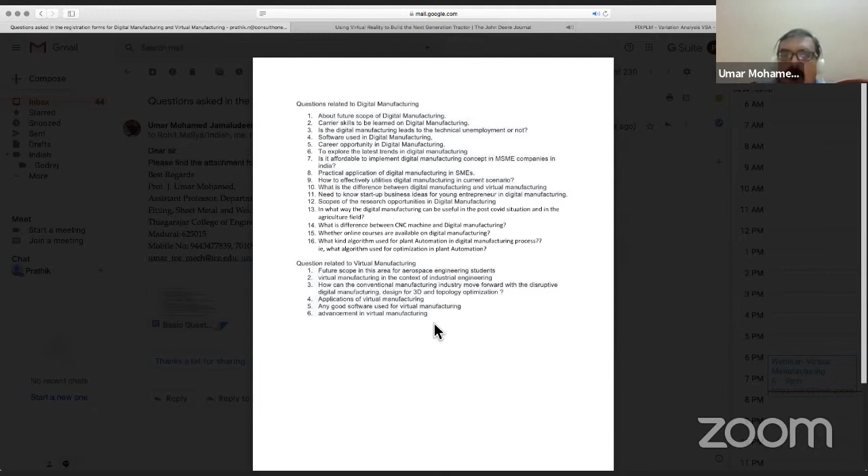No, sir. Thank you very much. Thank you, sir. Shall I conclude, sir? Yeah, conclude. Sir, am I audible? Yes, yes. Okay.